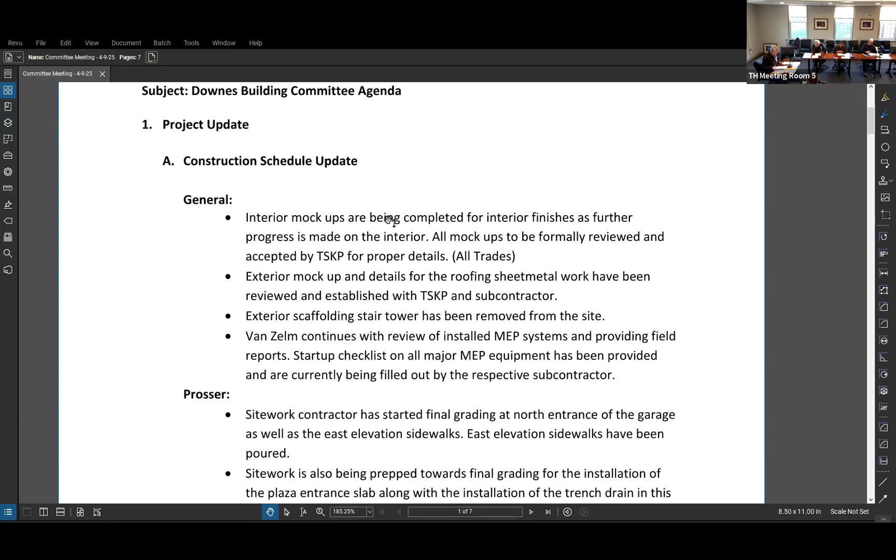We'll go down the standard agenda. I'll go through this first general item as quick as possible. Interior mock-ups are being completed as we progress further with finishes within the space to make sure we're building per the proper details with TSKP. Exterior mock-up details on the roofing sheet metal have been reviewed and established, with some minor tweaking to take care of there.

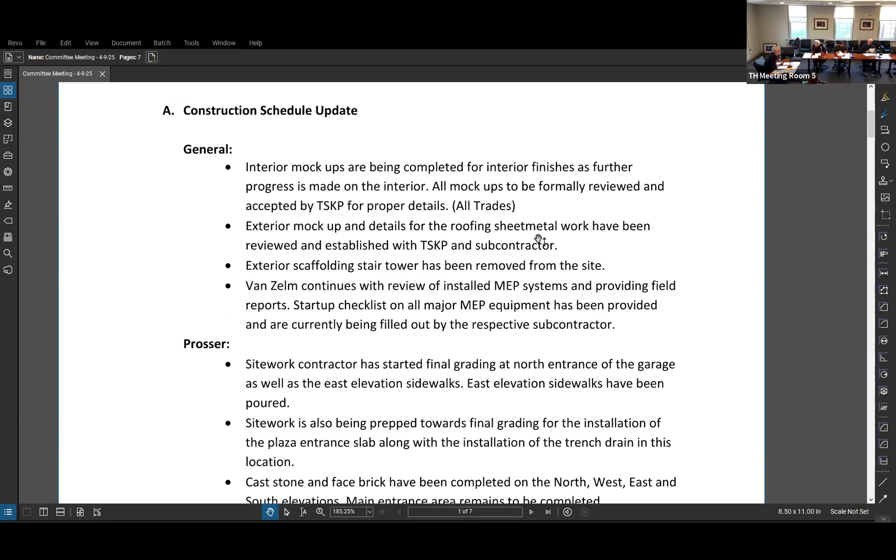Exterior scaffolding stair tower was removed from the site last week, opening up that south elevation so you could see the beautiful brick and glass and windows going in.

Van Zelm continues the review of MEP systems. We have engaged them and given them the startup checklist for our mechanical units. We should be starting those units up imminently, barring any issues that Van Zelm sees on the startup checklist. Some items aren't fully completed on the checklist because the units have to be started up before we can formally finalize those bulleted list items.

Going down to Prosser, the site work contractor, we started final grading at the north entrance of the garage as well as the east elevation sidewalks. We've poured about 65 linear feet of sidewalk on that elevation. Site work is continuing to prep towards final grading for installation of the plaza slab, along with installation of the trench drain over there.

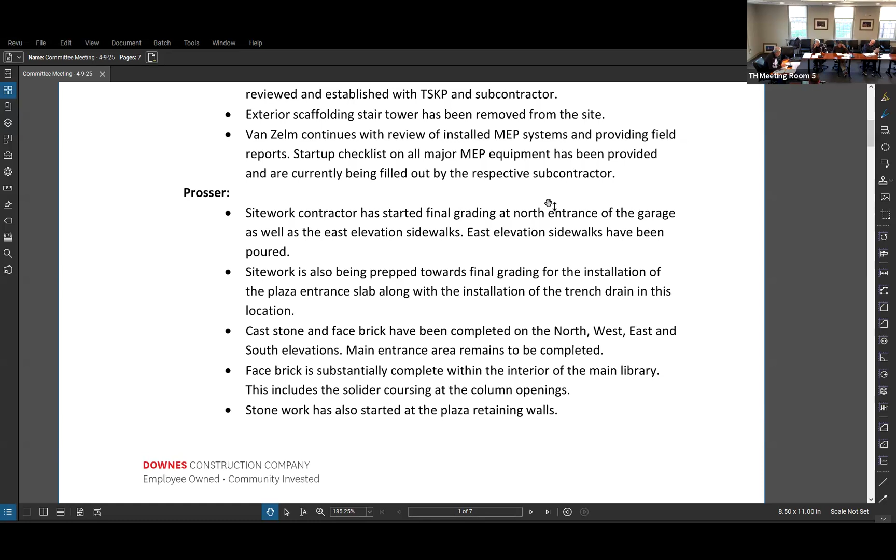Cast stone and face brick has been completed on the north, west, east, and south elevations. The main entrance remains to be completed, which they're finishing up. Face brick is substantially complete within the interior of the main library, including soldier coursing at all the column openings. We've completed the wash down of the brick inside the building - about 90% complete there.

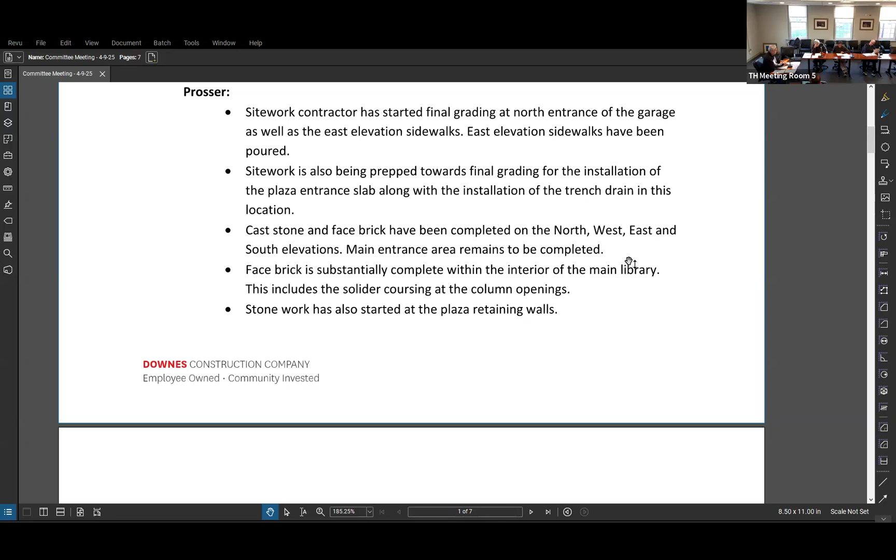The stonework has started on the plaza retaining walls. Spray foam insulation has been completed at the garage level, as well as the intumescent paint. The garage ramp and guardrail system has been installed. The porch guardrail system, if you drove past this afternoon, has been installed now that all the brickwork is down and all the conventional scaffolding is out of the way.

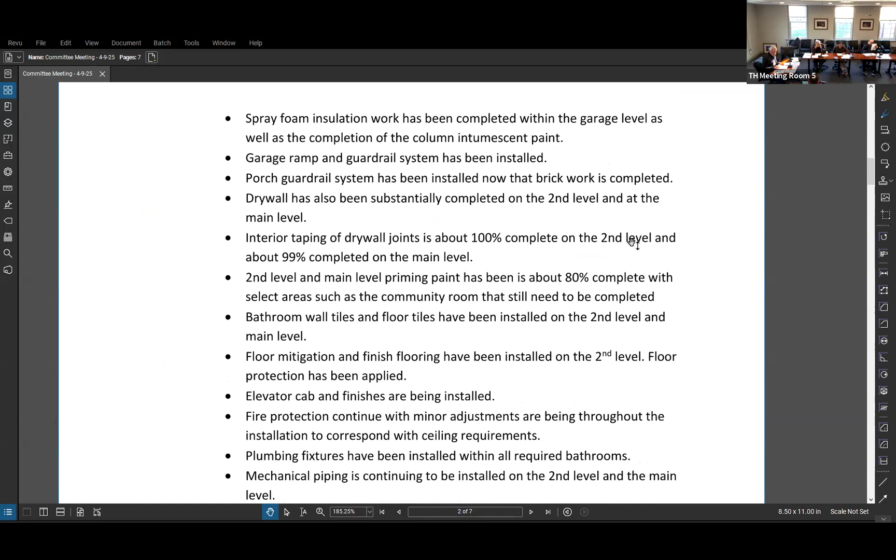Interior taping of drywall joints is 100% complete on the second level and about 99% complete on the main level, so we could close this item out. Anything that needs to get taped in or patched is a miss and will need to be taken care of if we need to get back into the walls for whatever reason.

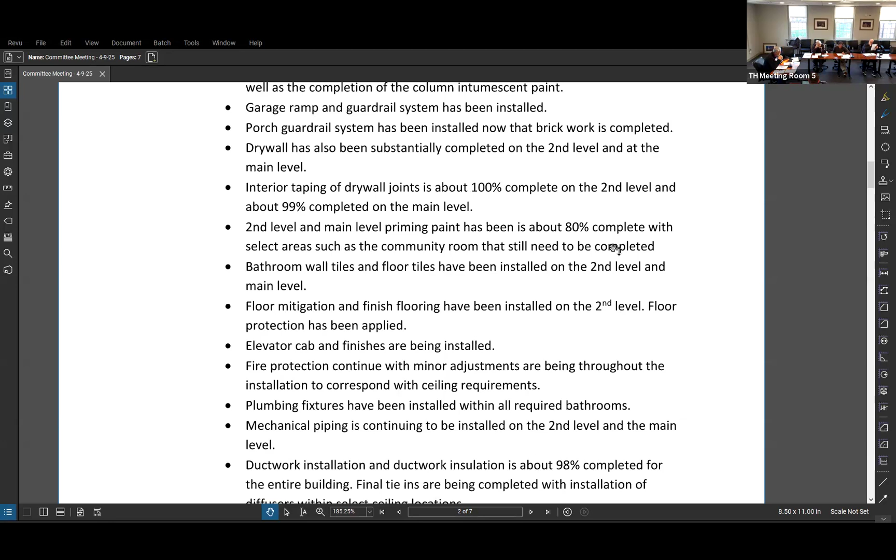Second level, main level priming paint is about 80% complete, with areas such as the community room still needing to be completed. Bathroom wall tiles and floor tiles have all been installed throughout the building. Floor moisture mitigation and finished flooring have been installed on the second level, and floor protection has been applied where we have the finished flooring down.

Elevator cab and finishes are being completed. Fire protection continues with adjustments as we put up ceiling grid and ceiling tile, so there's going to be minor tweaks there.

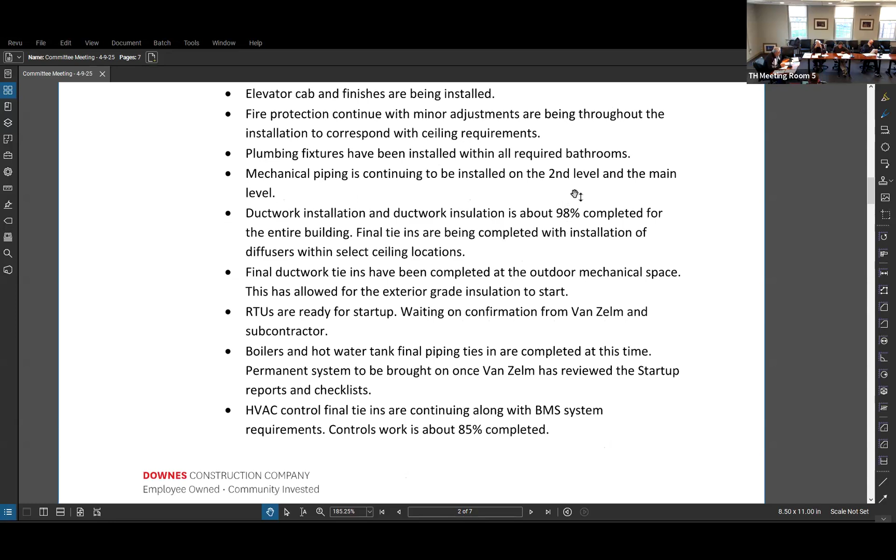Plumbing fixtures have all been installed in the required bathrooms. Mechanical piping is continuing to be completed, and ductwork, same thing there - final tie-ins are being completed. Final ductwork at the outdoor mechanical spaces is complete, allowing for the exterior grade insulation to keep continuing.

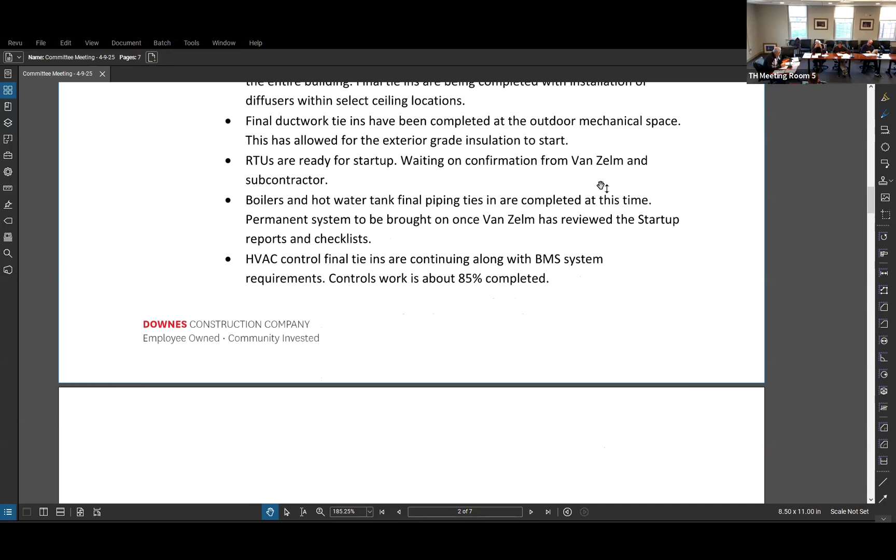RTUs, like I said before, are ready for startup - we're waiting on confirmation from Van Zelm, the subcontractor, and RZ. Same thing goes with the boilers and hot water tanks with the final piping tie-ins. HVAC controls and final tie-ins are continuing along with the BMS system requirements - we're about 85% complete with all controls work at this time.

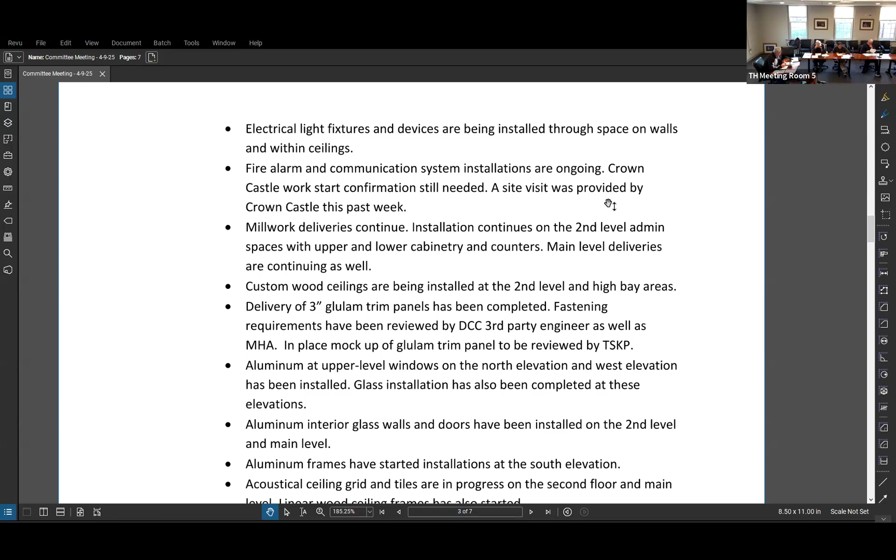Electrical light fixtures and devices are being installed throughout the space on walls and within ceilings. Fire alarm comm systems installation is ongoing. Crown Castle showed up to the site the other day for a preliminary walkthrough to get their ducks in a row, so hopefully within the next week or two we should see progress with their work. Thank you, Joe, Chris, and everybody who helped push this along - I really appreciate it. Millwork deliveries are continuing, with installations on the second level for upper and lower cabinets.

Main level deliveries are continuing as well. Custom ceilings are being installed on the second level in high bay areas. The 3-inch glulam panels have all been delivered.

We have our engineering complete. We should be starting that work shortly, but where we don't need those structural components, we have an in-place mock-up of a glulam trim panel that needs to be reviewed by TSKP.

Aluminum at the upper level windows on the north and west elevations have all been installed along with the glass. Aluminum interior glass walls and doors have been installed on the second level and main level throughout.

Aluminum frames have started installation, as you can see on the south elevation where we just completed the brick. I did get word that within a week we should have all the fire rated frames here that go up stairwell 1 and down in the garage area.

Aluminum frames and glass have started at that south elevation. As you can see, there's probably about 3 or 4 windows that have frames in and glass in already.

Acoustical ceiling grid and tiles are in progress throughout the whole entire space. Linear wood ceiling frames have also started. Acoustical cloud ceilings were laid out last week, and we are in there painting the cloud area blue.

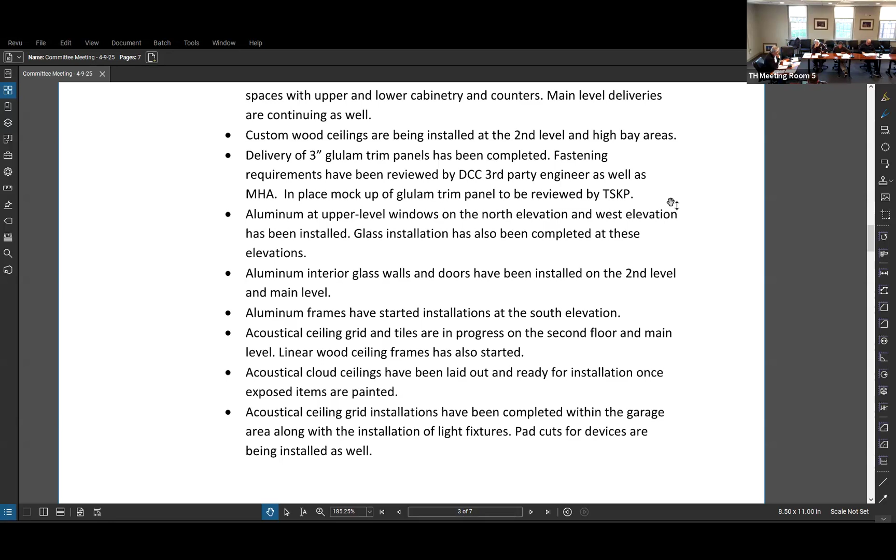Acoustical ceiling grid installations have all been completed within the garage. We started installing light fixtures, and anywhere we need electrical devices for pad cuts and sprinkler cuts has started down there. That takes us through the Prosser site.

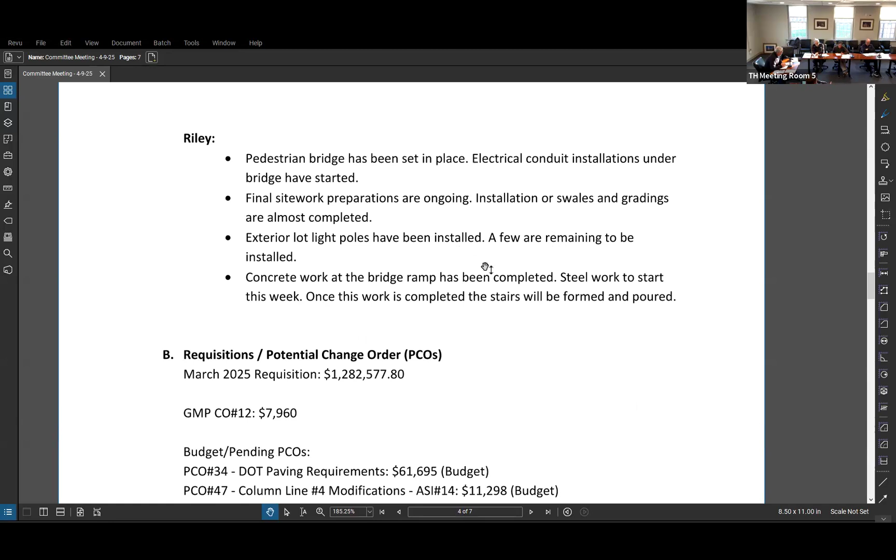Moving down the agenda, item B, we have requisitions and PCOs. First and foremost, we have submitted our March 2025 requisition. We're looking for approval from the committee tonight in the amount of $1,282,577.80. So moved. We have a motion for approval.

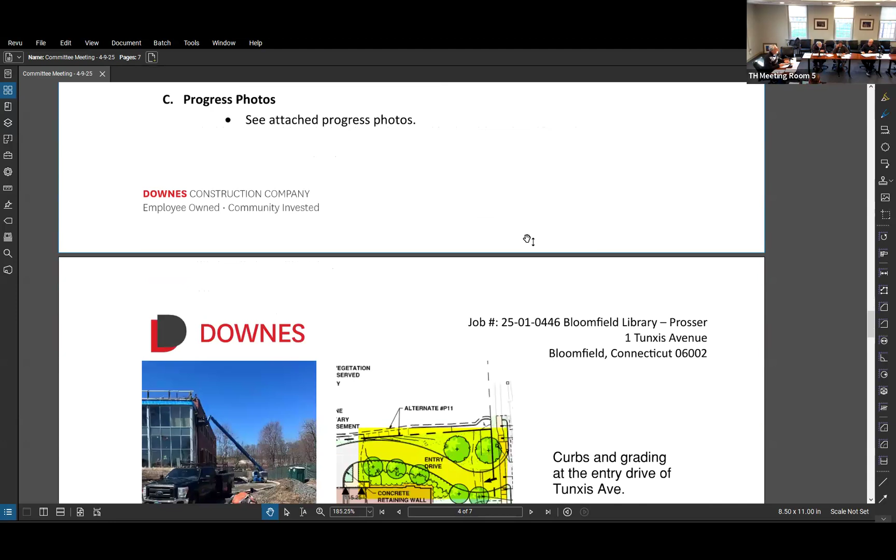Motion passes. Oh, you got pictures. We have pictures. That's our reward. That's it for the painfully listening to me speak for the last half hour, so we'll get some photos going.

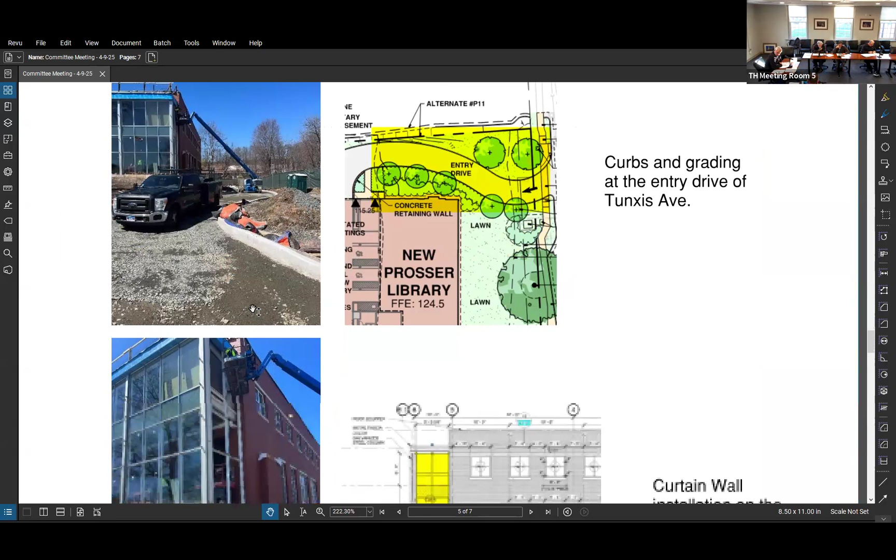All right, we have curbs and grading like I talked about on the driveway on the north side of the building heading into the north end of the garage. We're ready to go. Hopefully we get some asphalt down and paved out within the next couple weeks here. Curtain wall installation on the north elevation, that final corner there, going in and being completed as we speak.

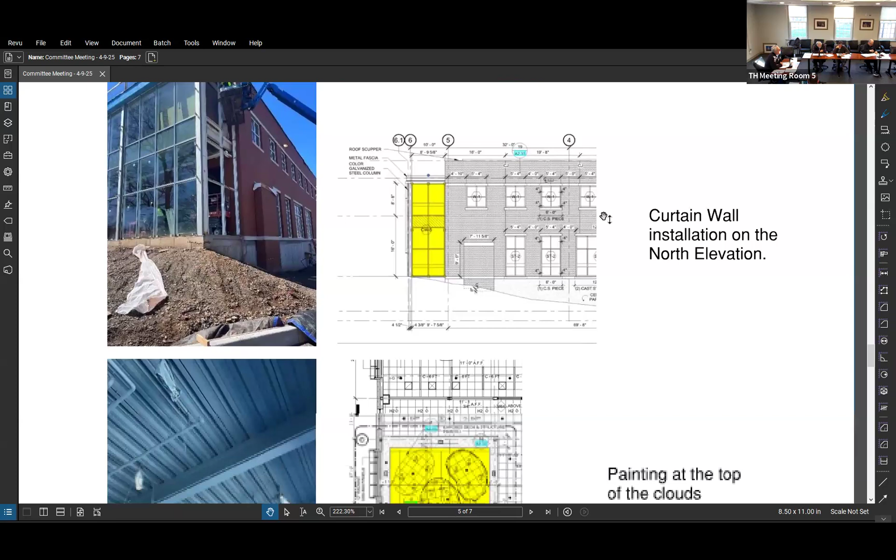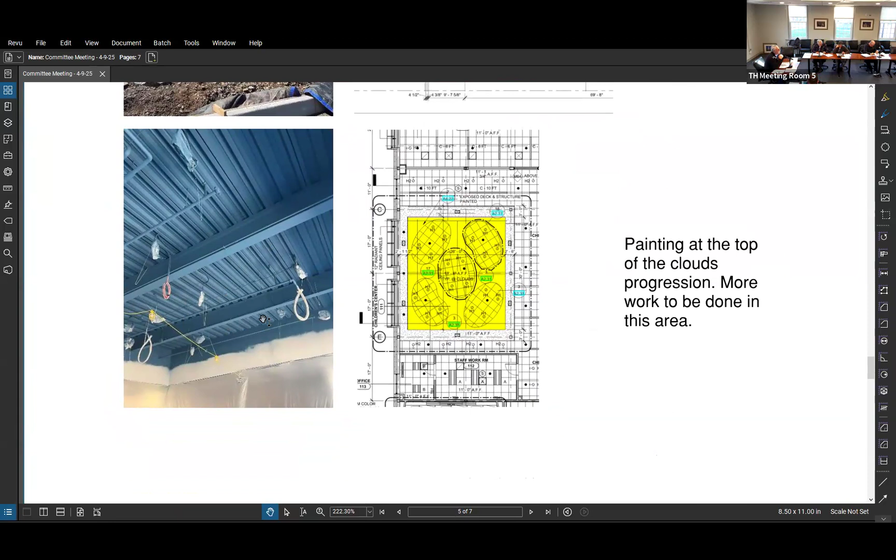This is the children's area. We are painting this area blue, and then we are going to put up the cloud ceiling installations once that's all said and done. It's not a final product. There is a lighter blue that is going to be applied here. It's going to look fantastic when it's all done. I'm excited to see that when we're done.

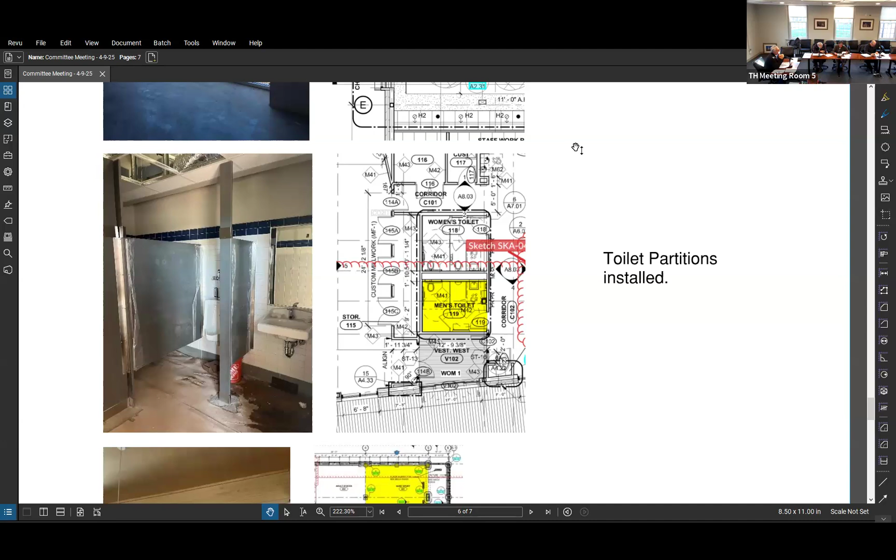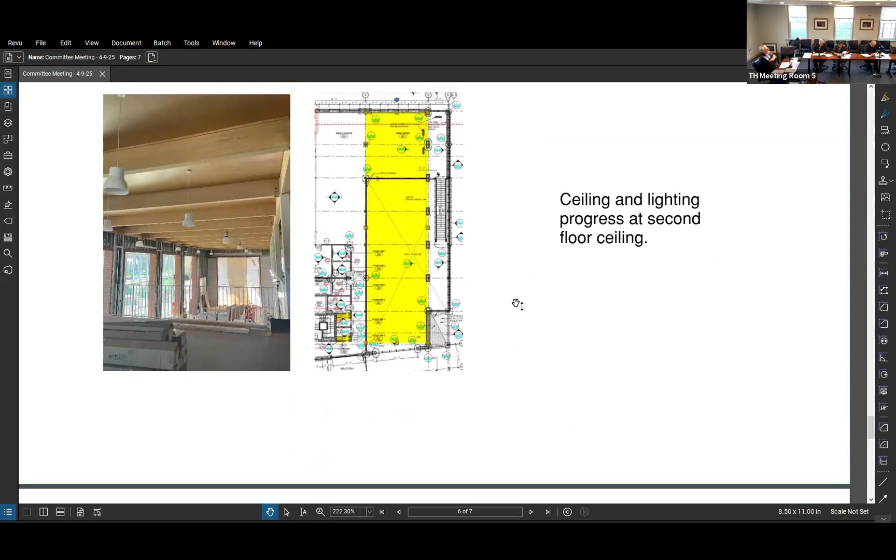Before you go past this one, I just want to make a comment. When you actually walk in and look at that, it looks much better than the picture. The pictures don't do it justice, not in the slightest. It's a fantastic sight. Agreed.

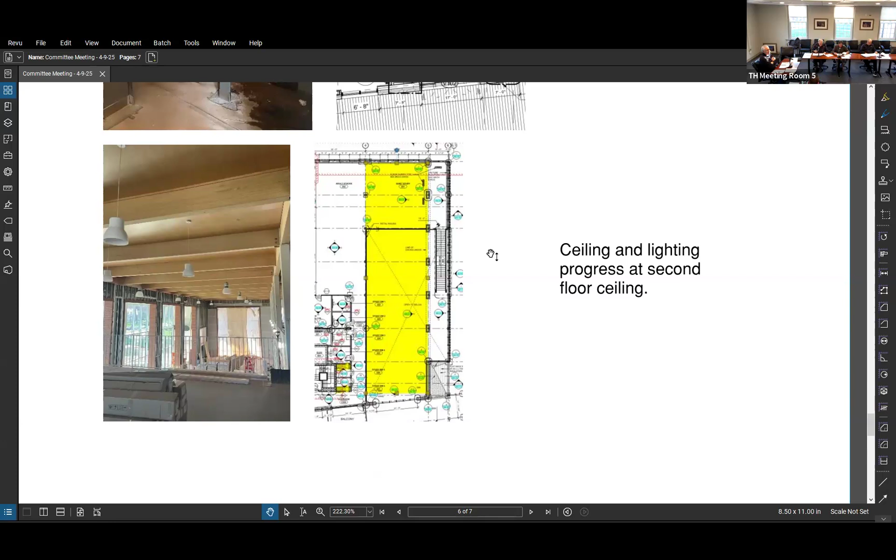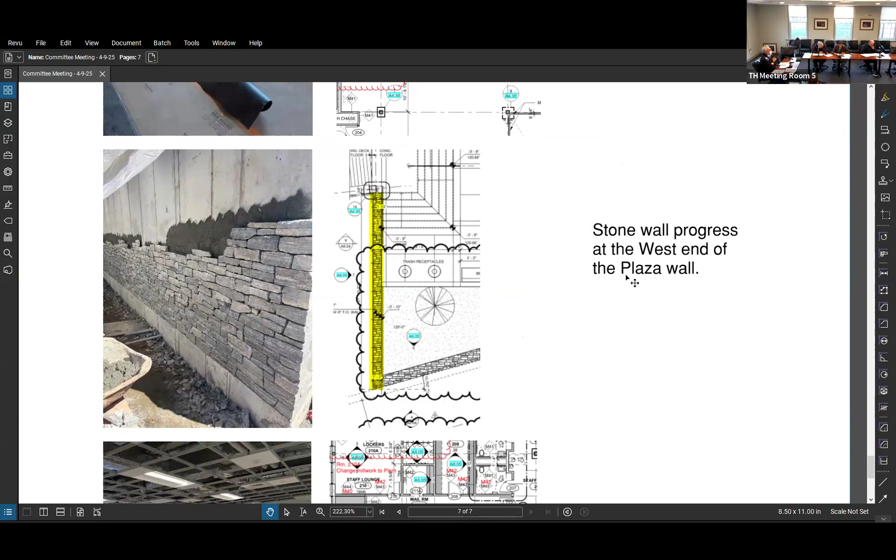All right, going down, you have fin tube radiation, the heating, being installed on the north side wall on the second floor. You could see here the stone wall progress at the west end of the plaza. Now that plaza retaining wall is starting to take shape and shed some light on the finishes there, which is fantastic. Another one where the pictures don't do it justice.

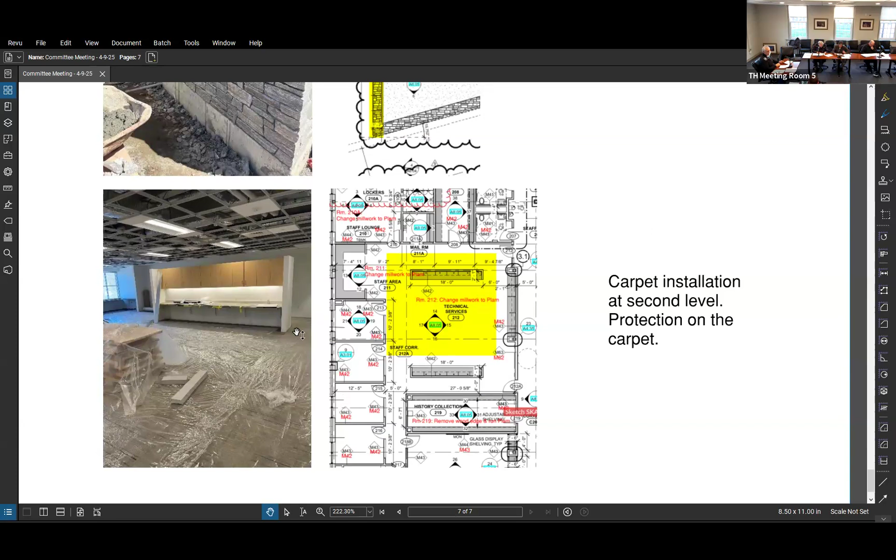You could see here the carpet installation on the second level. The carpet protection has been installed, millwork is in. As you can see here, light fixtures are in, devices in, and the ceiling pads are down. Once we're done there, we'll start padding out the ceilings. But you can see carpets in, counters are in, millwork's up, lights on, and that's it.

Alright, anybody have any final questions for Anthony and Downs? Patrick? Thank you, Mr. Chair. So Anthony, the substantial completion date, what are we up to now? Right now, we're June 6th.

I will be sending a monthly report out to everybody tomorrow morning first thing, but right now we're still maintaining June 6th. That's with some activities that will be taking place around the site, but that's not going to deviate the furniture, the FF&E, that's coming in on the 21st of May. Okay, correct.

And where will we be able to store that in the library? Yeah, we'll make provisions. So for us, our critical item is getting ceilings in and finished floor down and spaces opened up. The reason why that bumped out to June 6th is we might be working on some landscaping on the outside of the building.

Finishing the community room that has no FF&E other than chairs, and we're gonna utilize a closet in there. Those finishes kind of bump down the line a little bit, but it has no effect on the FF&E delivery. So you don't think that date's gonna change again, do you?

No. Okay. Last question, is the water turned on? Water's on, the sinks, the toilets flush, the sinks work, and it drains out the building. No leaks, nothing's leaking.